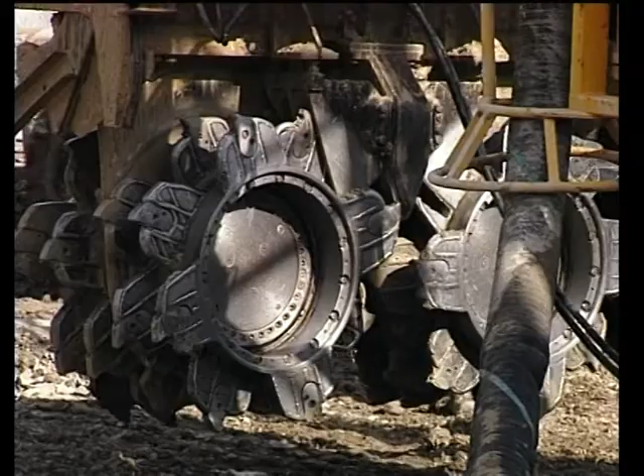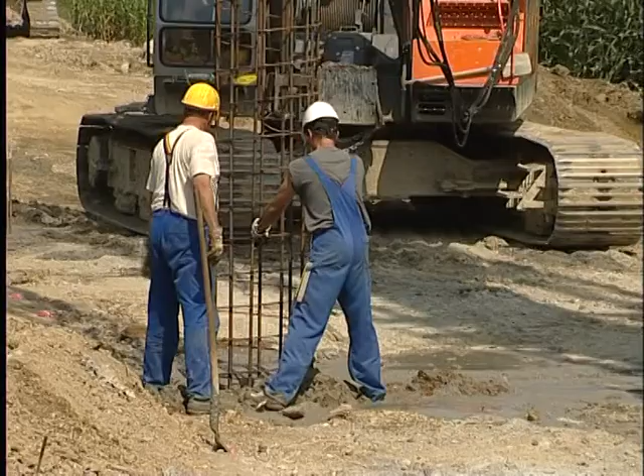We carry out excavations and foundations for large buildings. We do the groundwork for roads, railways and underground railways. We build canal locks. And we construct the foundations for bridges.

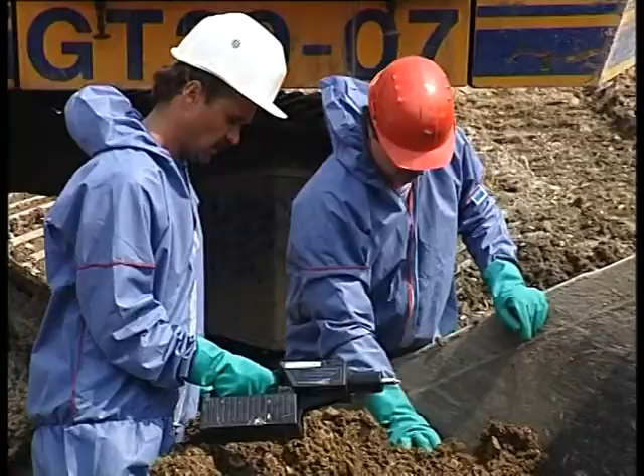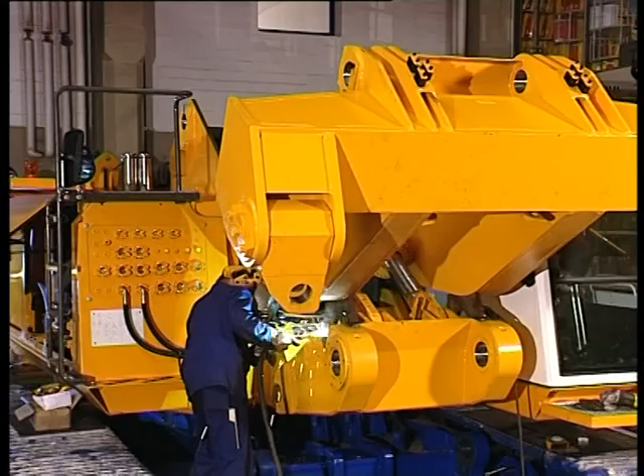There are further fields of activity surrounding this specialist foundation work, for example environment technology, bridge building, sewage treatment works, or renovating buildings. We also design and construct machinery for foundation works, ranging from large rotary drills, trench cutters, and diaphragm wall grabs to much smaller units. These days our market is the world.

The companies in the BAUER Group are active on all continents, carrying out specialist foundation works or selling and servicing machinery.

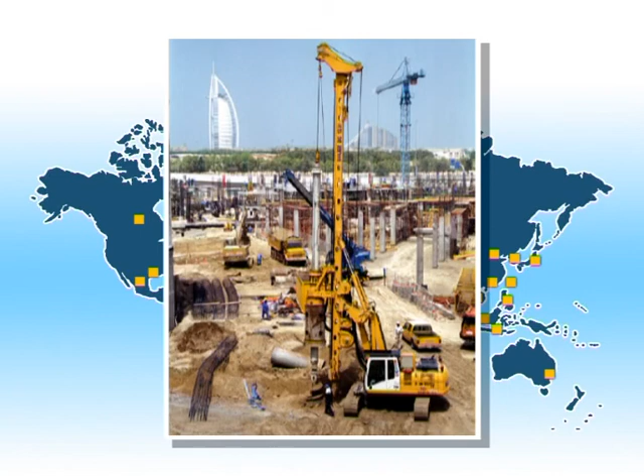It all started in the little town of Schrobenhausen in Bavaria. Over 200 years ago, Sebastian Bauer set up in business here as a coppersmith. Later generations turned to wells and water supply.

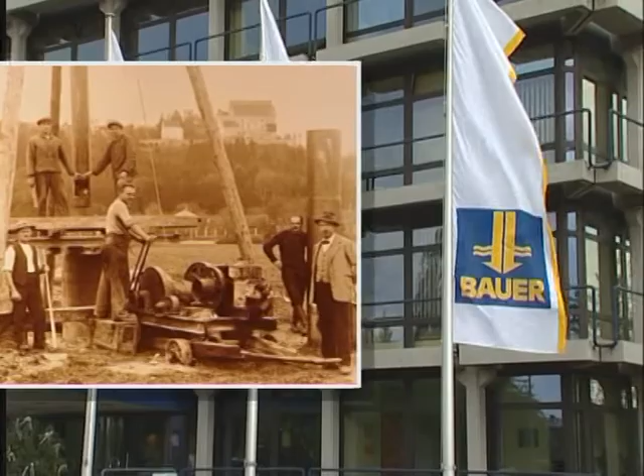After the Second World War, Dr. Karl-Heinz Bauer began to specialize in foundations. In 1958, his company invented the grouted anchor on a building site in Munich. Since then, it has been possible to tie back the walls of an excavation even in soft soil. The method was patented and the company grew on the strength of it.

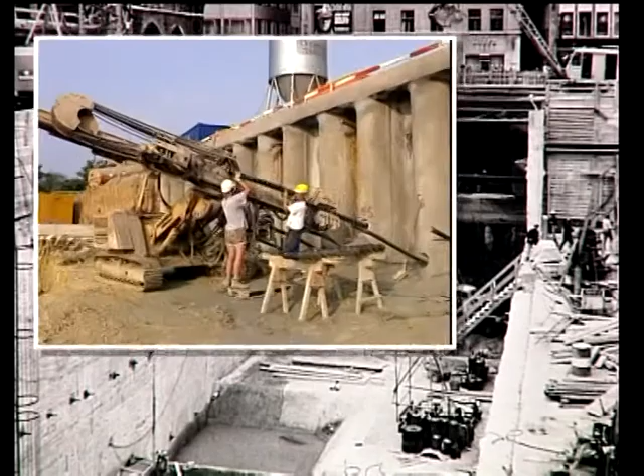There followed large-scale construction projects in many German cities, mainly building underground railways. As a result, Bauer know-how became sought after in other countries too, in the Arab world in the 1970s, later mainly in the Far East.

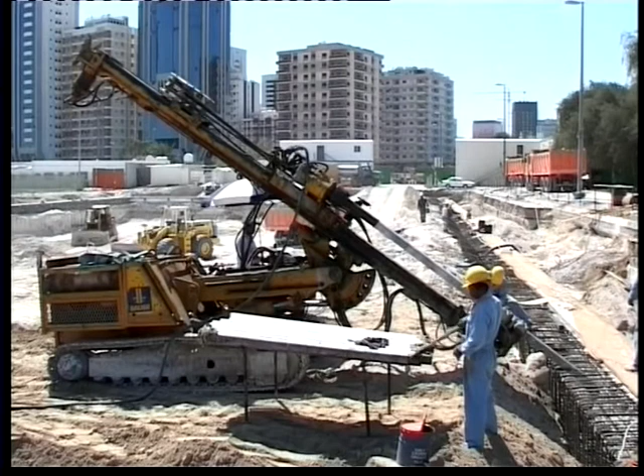The company gradually grew in size, expanded in new dimensions. New business structures became necessary. The organization adjusted step by step. In the 1990s, Bauer became a joint stock corporation.

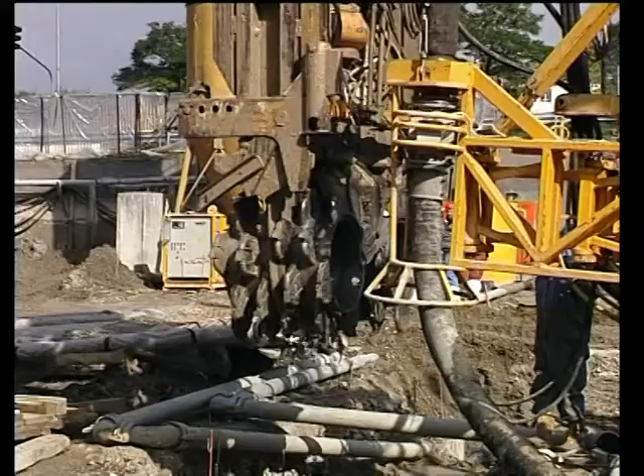Professor Thomas Bauer is the chairman of the board of BAUER AG and the seventh generation at the head of the family firm.

At board meetings, corporate strategies are decided jointly. Divisional objectives are discussed and the results analyzed.

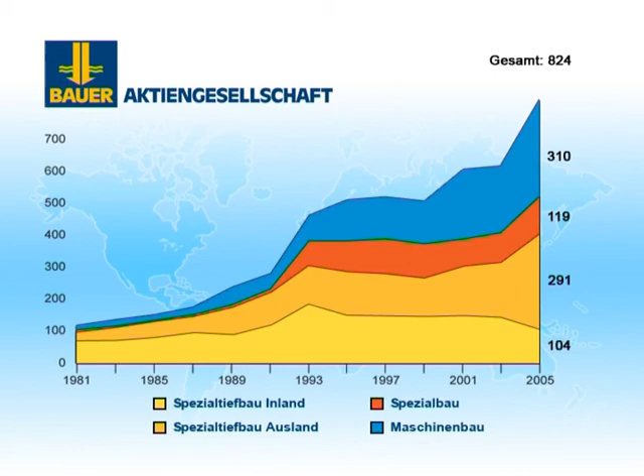And successfully too. In the past 25 years, total revenues have risen from 100 million euros to over 800 million. The group employs more than 5,000 people all around the world.

BAUER AG is the holding company and also acts as a service company for the operative companies in the group. They are autonomous companies under the umbrella of BAUER AG.

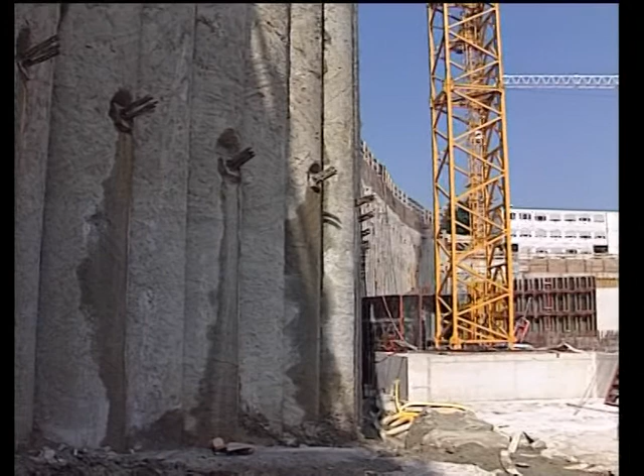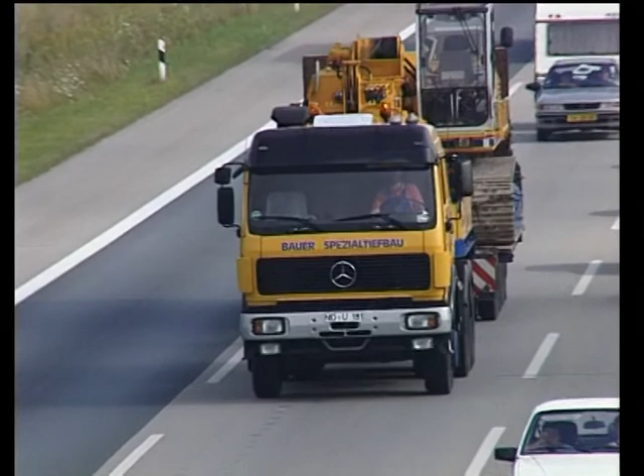BAUER Foundations is active on construction sites all over the world. The contracts represent a challenge not just in technical know-how, but also in organization and logistics. These tasks are carried out in the project management department and in subsidiaries and field offices worldwide.

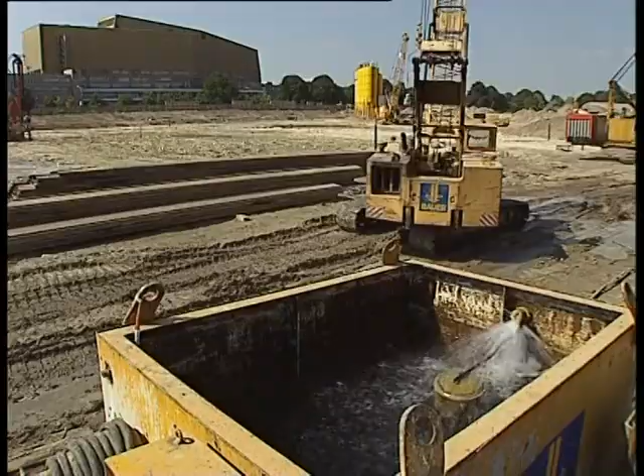In the past few years, BAUER Foundations has increasingly acted as a main contractor for large-scale projects throughout Germany. In the 1990s, we were involved in extensive rebuilding works in Berlin.

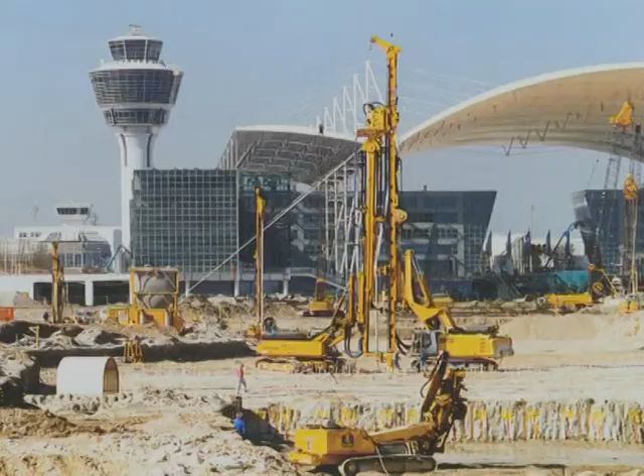We took part in infrastructure projects such as the Frankfurt-Cologne Intercity Express Link, helped to build Terminal 2 at Munich Airport and the Elbe Canal locks at Hohenwarte and Lauenburg.

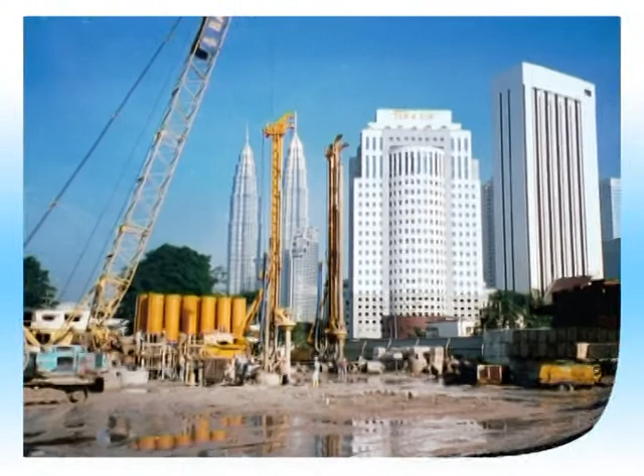Our outlook extends far afield: the Arab world, the Far East, Africa, North and Central America. We build in hot desert climates or on the Arctic Circle.

Wherever we're active abroad, we cooperate with partner companies and use local labor. People of all races and religions come together under the BAUER logo.

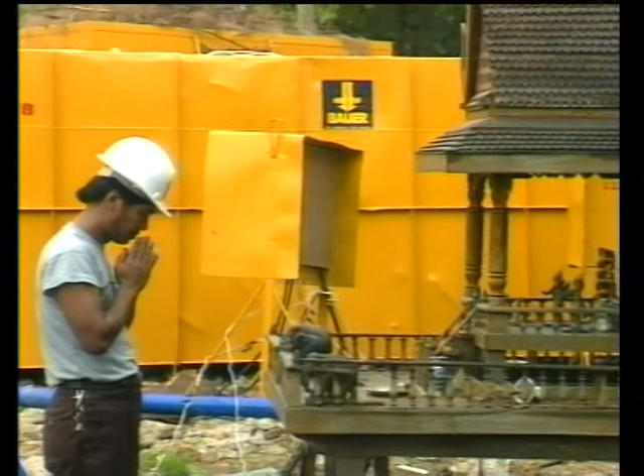The works are carried out by our specialist departments. Each department concentrates on a particular method, has its own specialized machinery and its individual expertise.

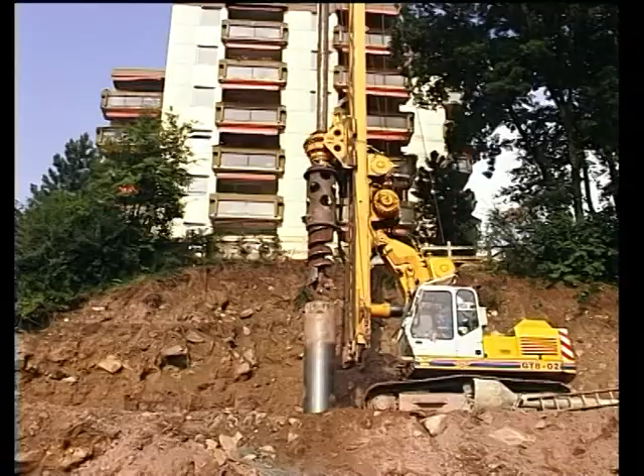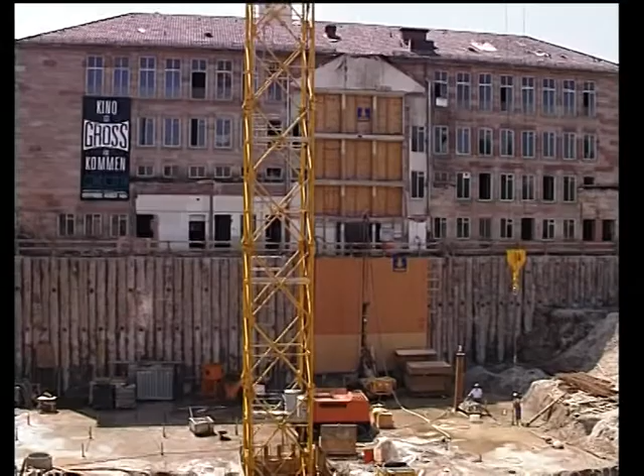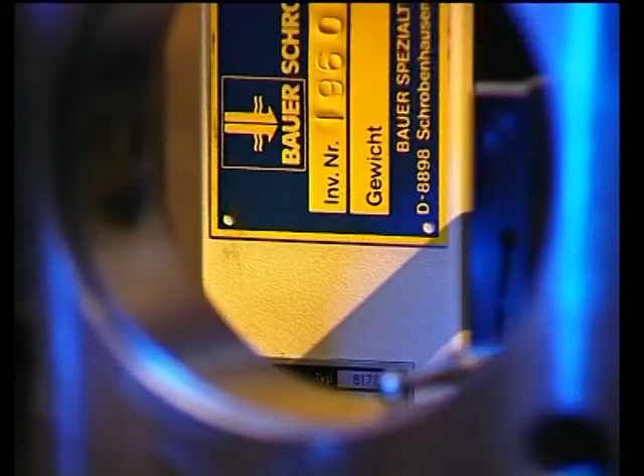Piling is one of our main fields. The technique has acquired new momentum thanks to numerous variants of foundation piles and piled wall systems. In the past few decades, we have worked constantly on improving all the methods involved in specialist foundation work, with innovations in pile boring,

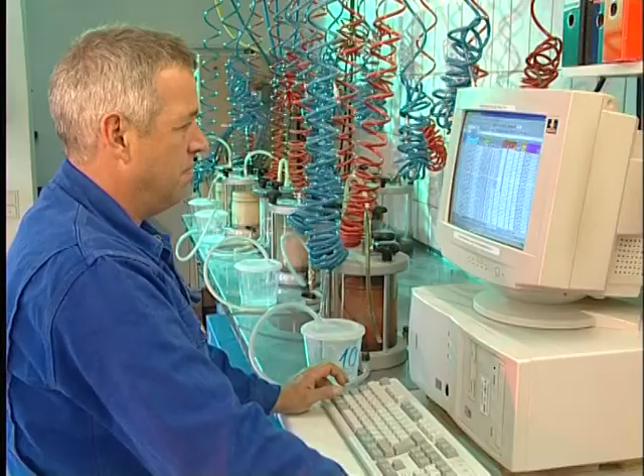For BAUER, developing new construction methods is a tradition and at the same time a commitment. Our construction techniques department follows every innovation, checks and tests it, and looks after our numerous patents.

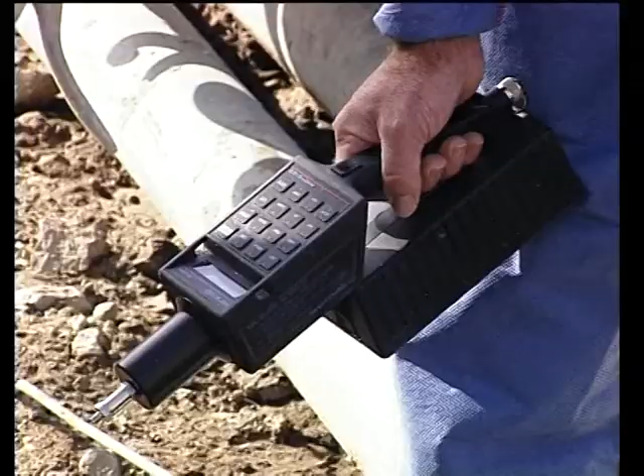Besides our main field of specialist foundations, the BAUER Group also carries out various related works. BAUER and Mourik Environmental Engineering is active in clearance of hazardous sites, including decontaminating soil and groundwater, and has an experienced plant construction department.

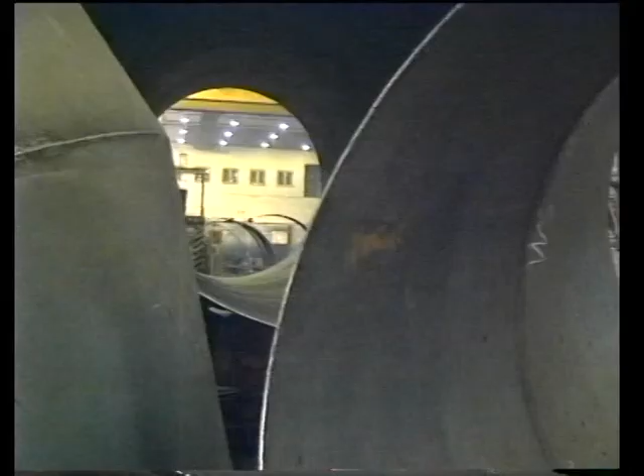Schachtbau Nordhausen is engaged in bridge building and other civil engineering projects. It also constructs complete sewage treatment works and has an experienced machinery department. Our subsidiary SPESA restores and renovates historic buildings. These two companies together represent the third largest employer in the North Thuringia region of the former East Germany.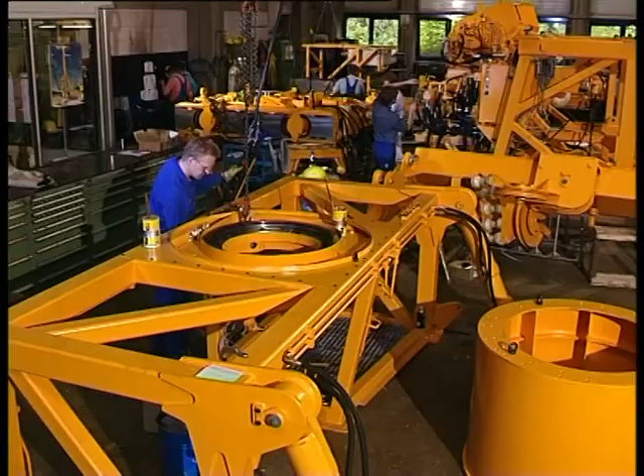In the last 30 years, equipment construction has become the second main pillar of the BAUER Corporation, alongside building works. BAUER Equipment has been an autonomous company since spring 2001. It designs and constructs machinery for foundation work.

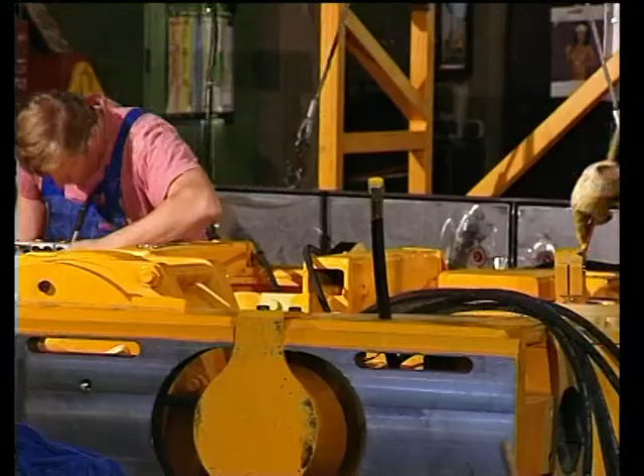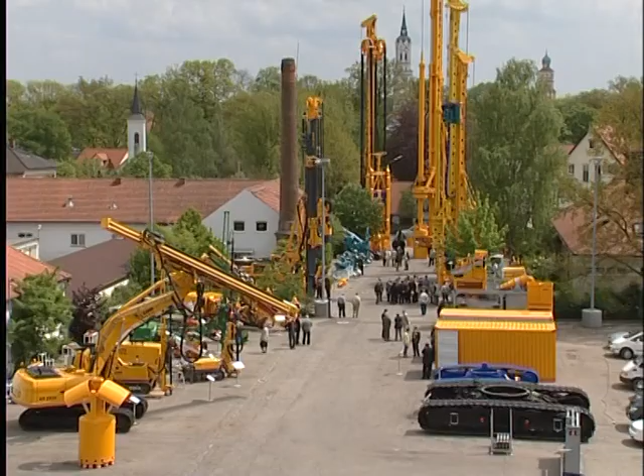The tradition of mechanical engineering goes back to 1970, when BAUER found there was no suitable equipment for the new methods it wanted to introduce in foundation works. Only a few years after the first anchoring drill, we produced the first large rotary drilling machine. In the 1980s, there followed the breakthrough with trench cutters.

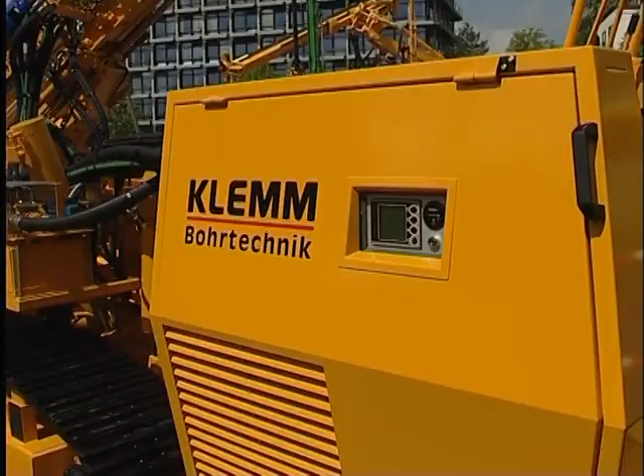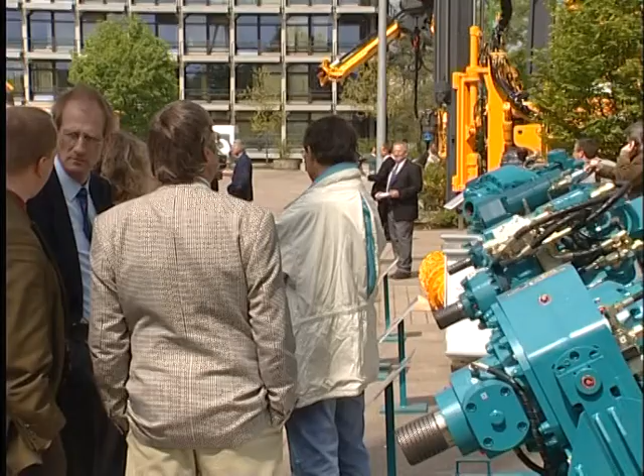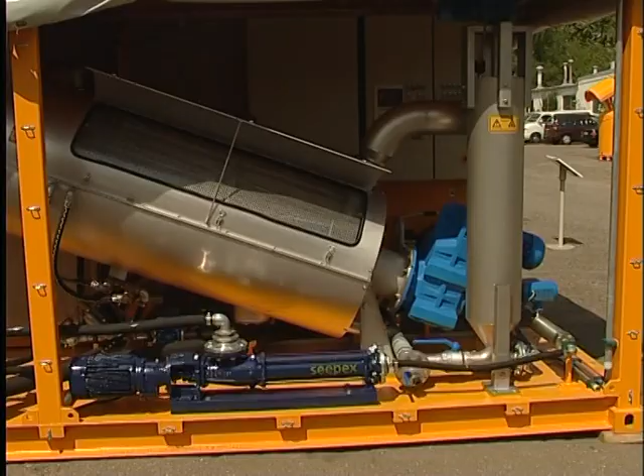BAUER Equipment is now a combine of several companies working in this field. Klemm Bohrtechnik is our specialist company for anchor technology. Eurodrill are experts for drifters and rotary drives. Schachtbau Nordhausen build undercarriages for drilling rigs and trench cutters. MAT specializes in mixing and separating drilling slurries. RTG is the company for sheet pile drivers.

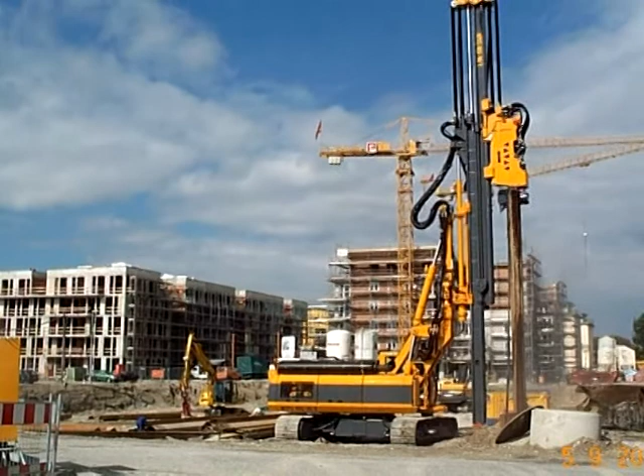Our machines are assembled at several sites. The large machinery comes from our factories in Schrobenhausen and nearby Aresing.

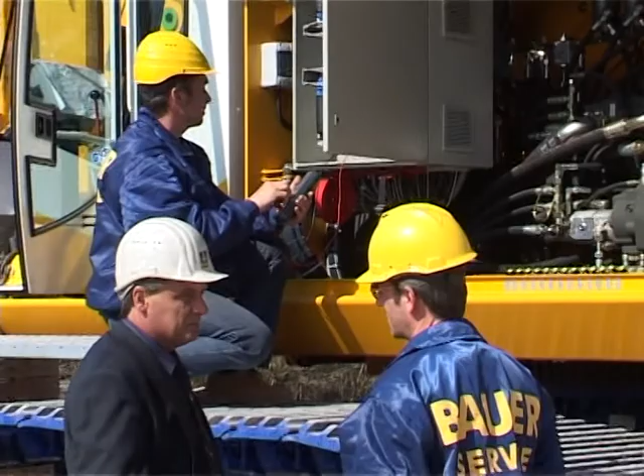BAUER Equipment looks after its international clients with a network of sales offices and site support offices all over the world. But we don't just sell machinery, we also pass on our drilling know-how, provide technical training and on-site support for our customers. Our after-sales service is quickly available, even in the furthest corners of the earth.

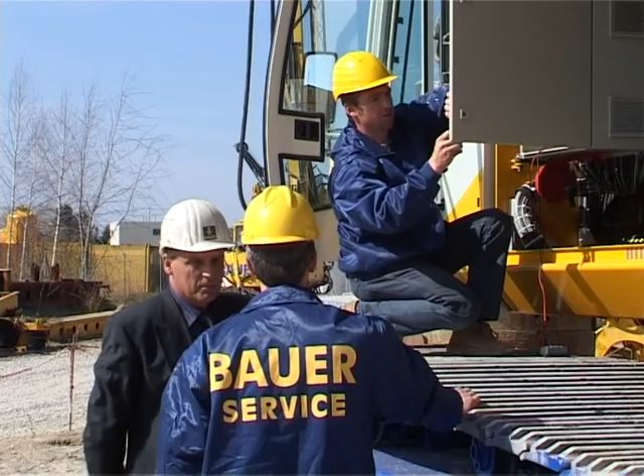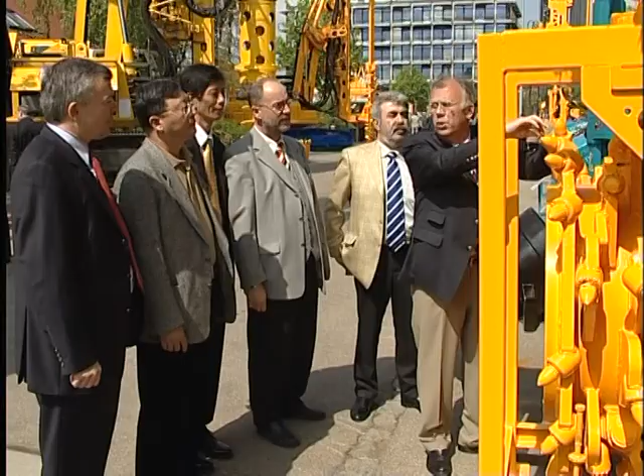Every 3 years, BAUER Equipment shows its products at the Bauma Trade Fair in Munich. In the years in between, there are presentations at our premises in Schrobenhausen. Guests regularly come from all over the world to see our own exhibitions. They particularly welcome the visits to construction sites where they can see the equipment and the techniques in action.

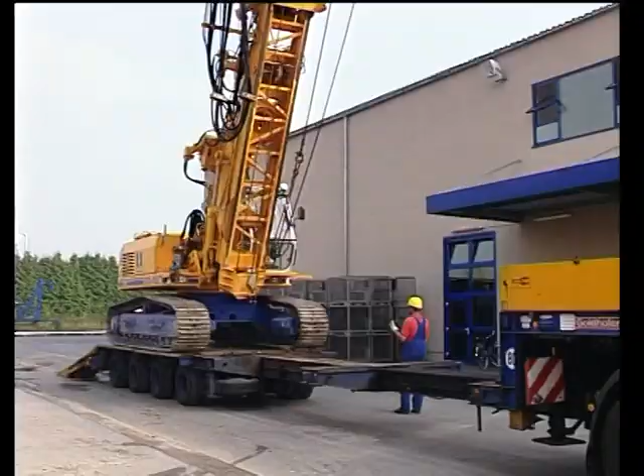Whether we're active in Tibet or in the Philippines, or preparing building ground in Abu Dhabi, or a cutter is sealing on the ground for a dam in the Himalayas, many threads come together at the head office in Schrobenhausen. From here, we look after the subsidiaries and the sites. Our people all over the world can turn to us for support.

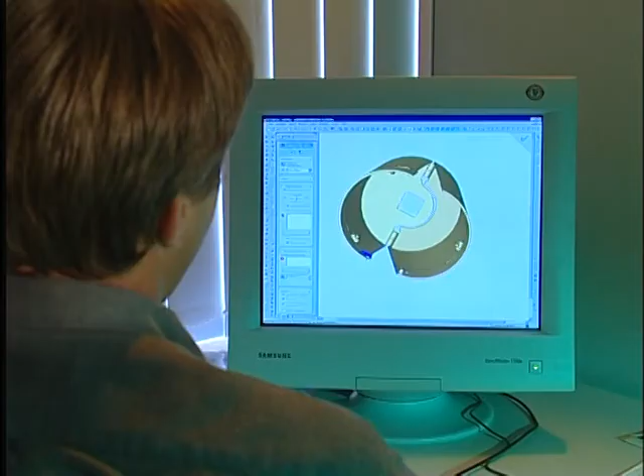Besides the financial management of the whole group, the heart of our headquarters is the planning and design offices for our civil engineering and mechanical engineering operations. This is where our engineers put their in-depth knowledge into practice, and our courage to make innovations in all technical matters comes to the fore.

Schrobenhausen is also our training center. At any one time, around 100 young people are learning various trades here.

We see that our engineers and business staff are kept constantly up to date, and in our conference center we frequently welcome guests from all over the world, tell them about new developments and give them the chance to meet and discuss with the specialists, for example during our Schrobenhausen conventions.

BAUER, leaders in advanced foundation technology.